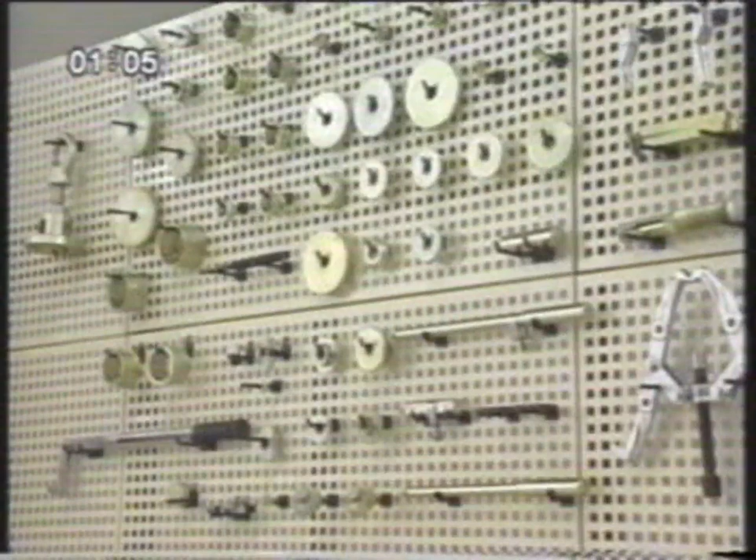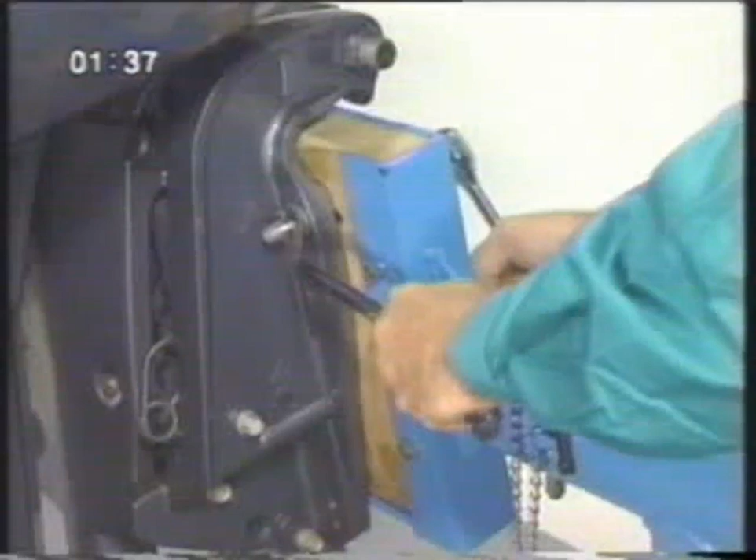For reliable disassembly work, check that the required tools and measuring equipment are all present. We recommend the use of Yamaha's original special tools to assure efficient, reliable work. We recommend you use the repair stand available from Yamaha to efficiently carry out the disassembly and reassembly of the power unit. The outboard motor should be secured to the repair stand with the bolts and nuts through the transom bracket.

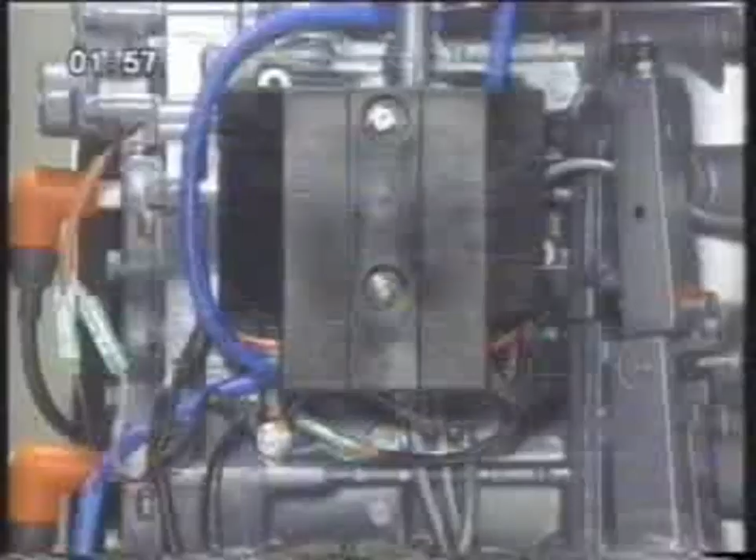Remove electrical parts from the starboard side. Remove the rectifier regulator. Remove the lead wire coupler and the ground. Then remove the two bolts. Remove the rectifier regulator together with the cover. Remove the shift rod lever and the solenoid lead wire joint. Remove the choke link rod on the carburetor side.

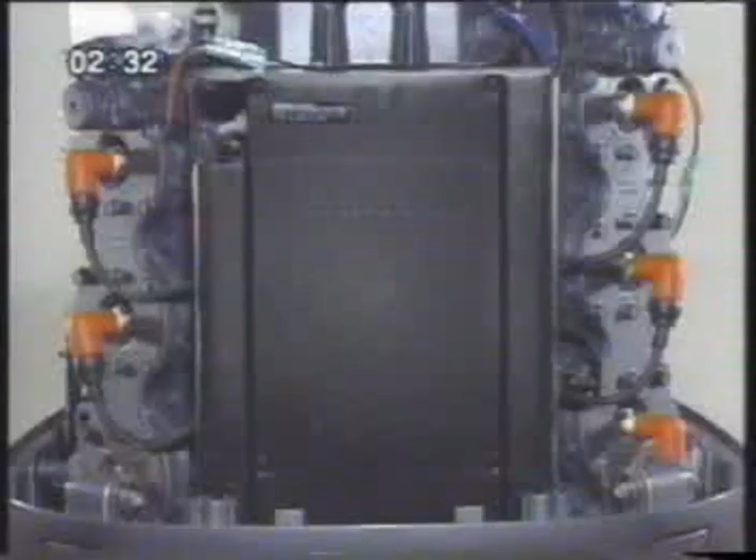Remove the CDI unit cover at the rear of the engine. Remove the coupler from the CDI unit, spark plug caps, and the ground lead from the exhaust cover. Remove the CDI unit and the ignition coil together with the bracket. Further remove the cooling water bypass hose and the pilot water hose.

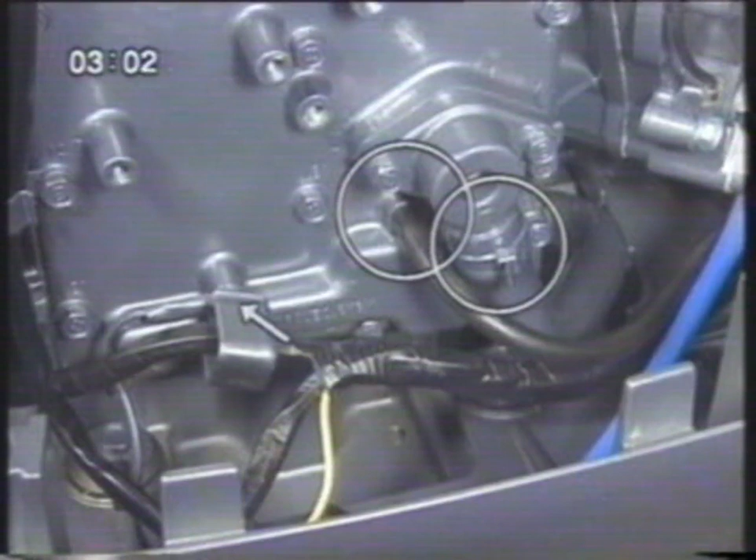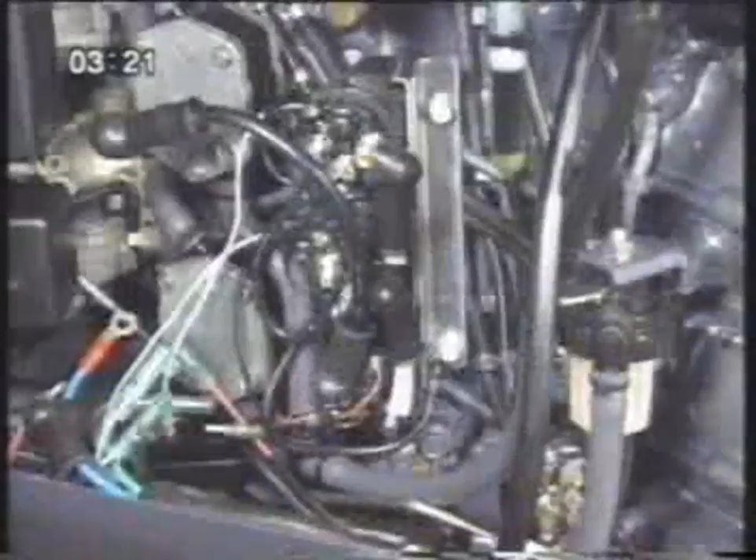Move to the port side and remove the battery cable, power trim and tilt wires, and starter relay wires. Now, remove the starter relay and the power trim and tilt relay together with the bracket. Remove the two bolts holding the shift rod bracket.

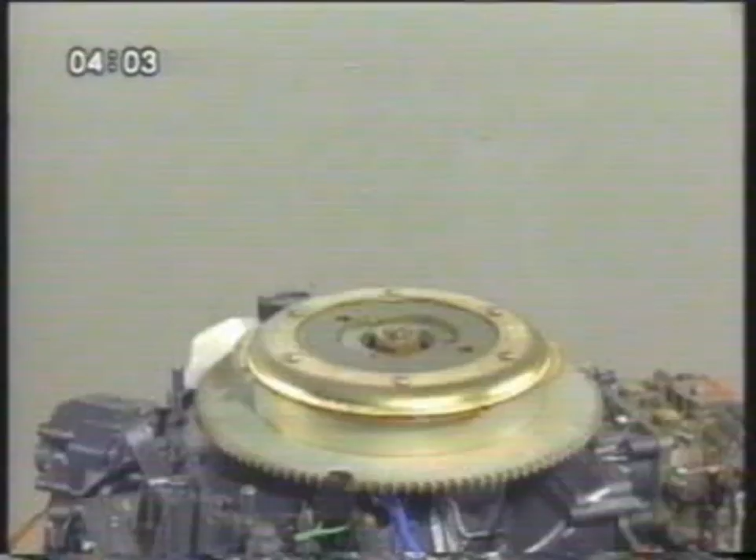Remove these screws and remove the silencer. At this time, remove the oil tank air breather hose and the fuel circulation hose attached to the silencer. Some models utilize silencers which separate into two pieces. Remove the flywheel cover, then remove the flywheel magneto. Loosen the flywheel nut by using the special tool and socket wrench.

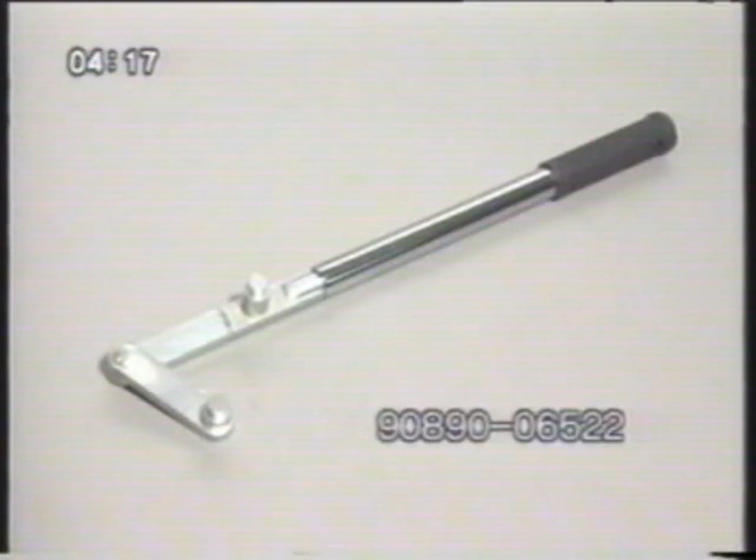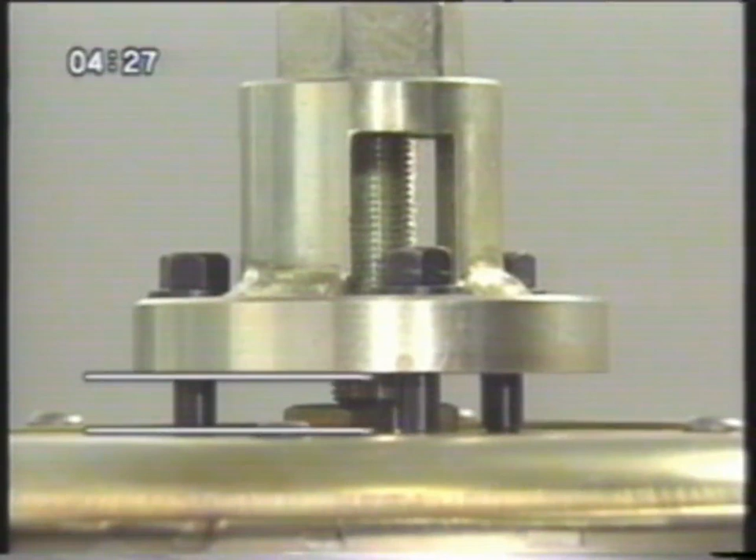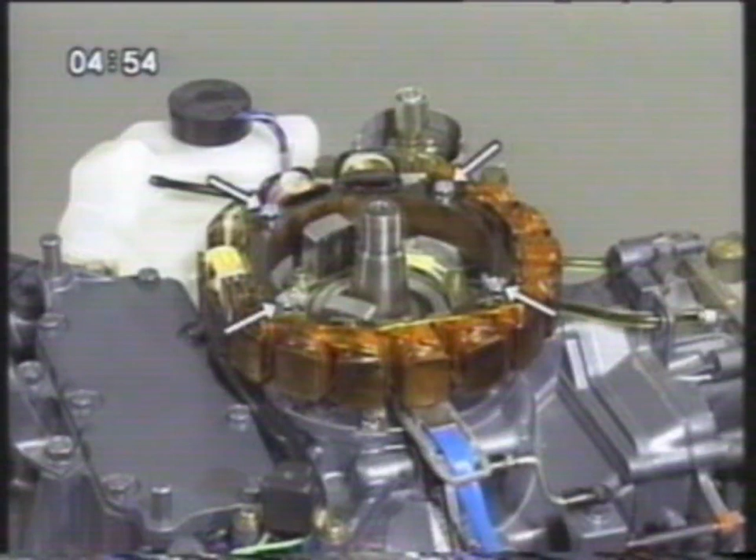Mount the flywheel puller so that the bottom will be parallel with the flywheel. To remove the flywheel magneto, mount the special tool and tighten the eye bolt. Apply impact to the eye bolt with a hammer to remove the flywheel from the taper fitting design. Remove the flywheel. Remove the stator coil assembly and the pulser coils in this order.

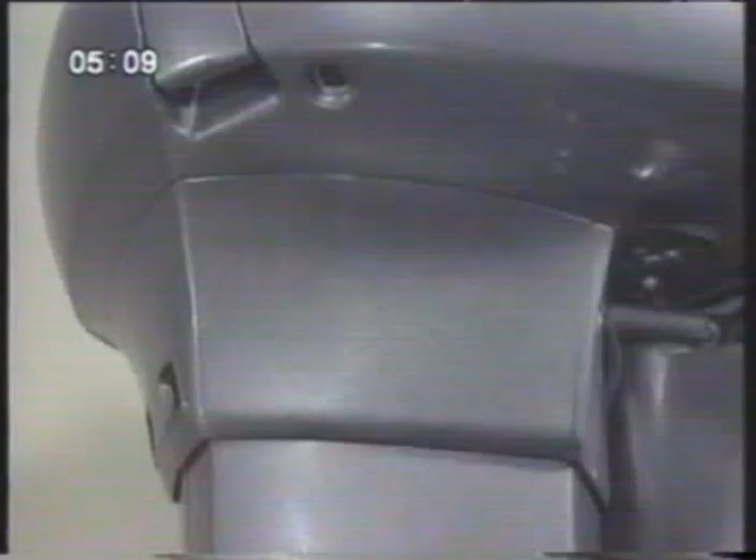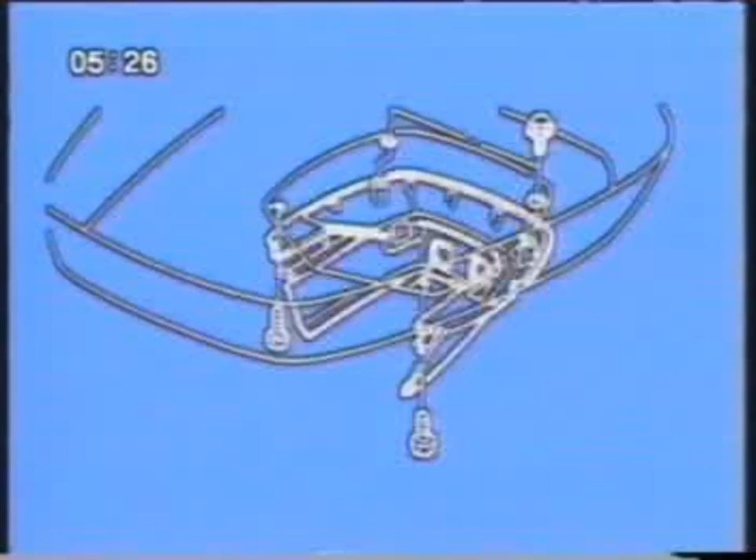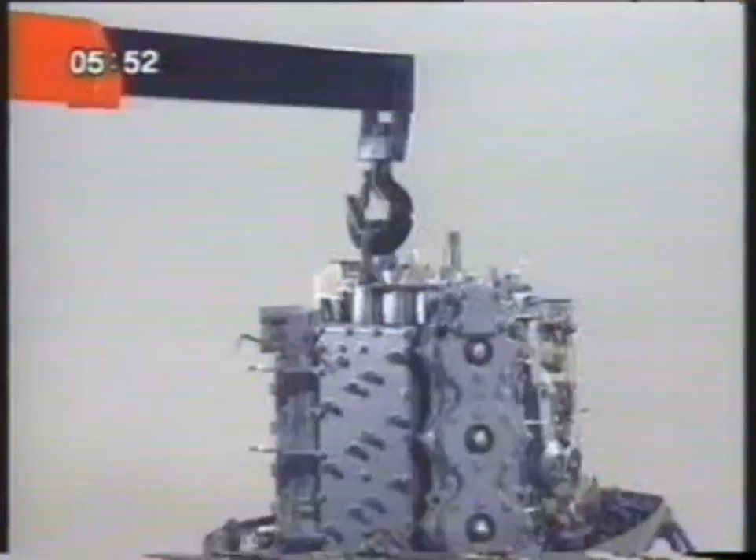Before removing the power unit from the upper case, remove the 2 apron mounting bolts and remove the apron. Remove the 2 inner bolts and 2 outer bolts from the bottom cowling, and remove the rear apron section. Now you can remove the 10 bolts and 2 nuts securing the engine to the bottom cowling. After removing the bolts and nuts, lift the engine upwards.

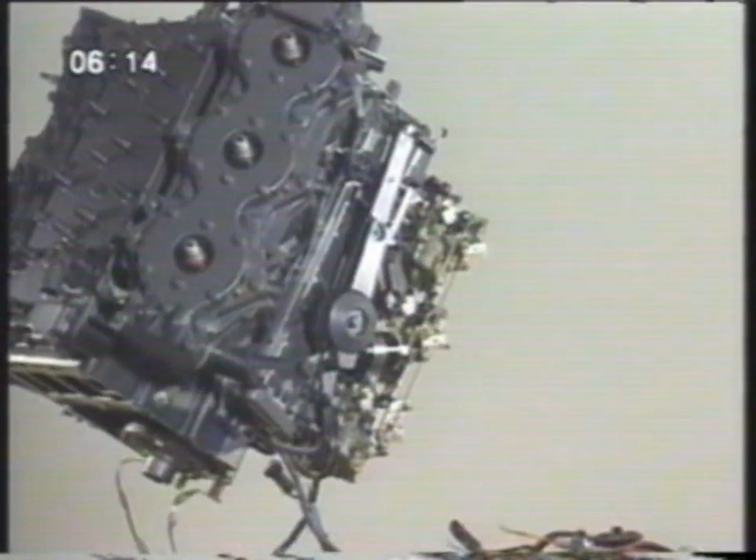Keeping the power unit balanced, lift it while carefully applying force under the carburetor with a wooden stick to remove the adherence of the upper casing gasket without damaging the bottom cowling. The power unit can also be lifted in this way. When placing the power unit on the workbench, be careful to keep the power unit stable.

Remove the fuel filter nut and fuel pump mounting bolts. Remove the 12 nuts mounting the carburetors. Remove the fuel filter, fuel pump, and carburetor together. For the oil injection model, remove the oil tank delivery hose on the oil pump side. When doing this, pinch the hose off to prevent oil from flowing out. Remove the oil tank. Remove the starter motor.

Remove the oil pump delivery pipe at the intake manifold side and remove the oil pump together with the delivery pipes. At this time, mark the delivery pipe with cylinder number to facilitate assembly. Remove the parts of the timing advance control system. Remove the bolts and remove the timing advance control lever together with the throttle cam. Remove the 2 bolts and remove the choke solenoid. This completes the removal of all the engine's outer parts.

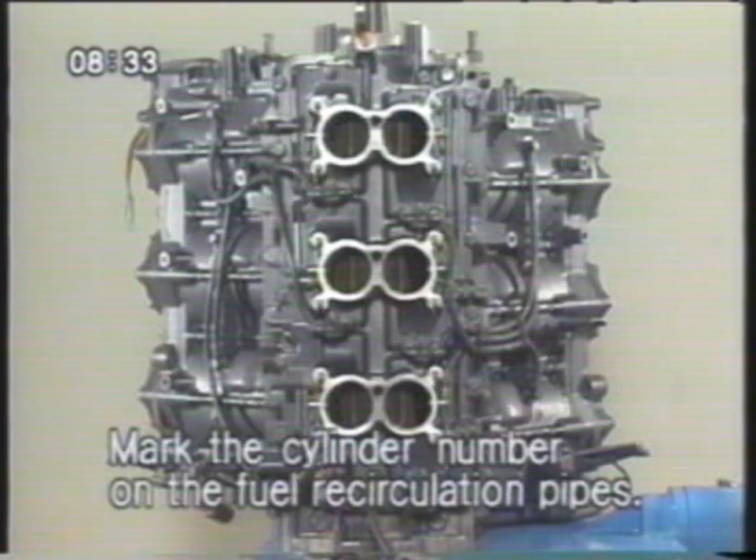You are now ready to begin the disassembly of the cylinder block. Remove the fuel recirculation pipes located on the cylinder block side. At this time, mark the cylinder number on the fuel recirculation pipe for easy and correct reassembly procedures. Remove the bolts and remove the intake manifold.

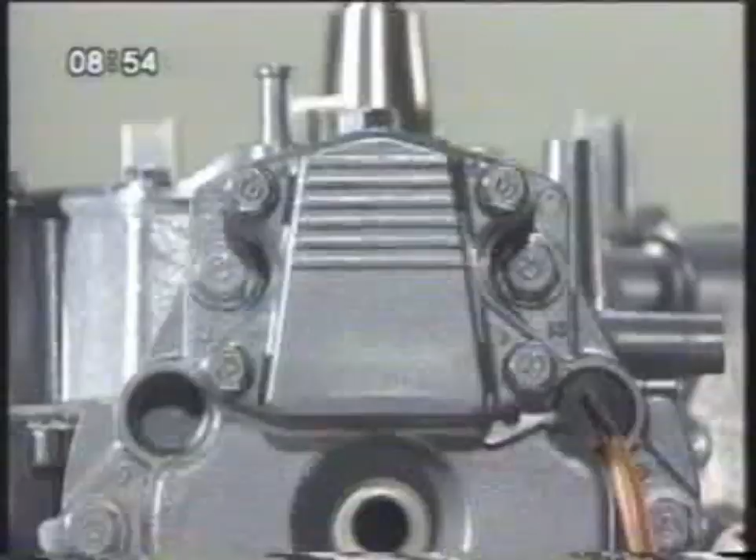After removing the spark plugs, remove the bolts and thermostat cover. Remove the thermostat.

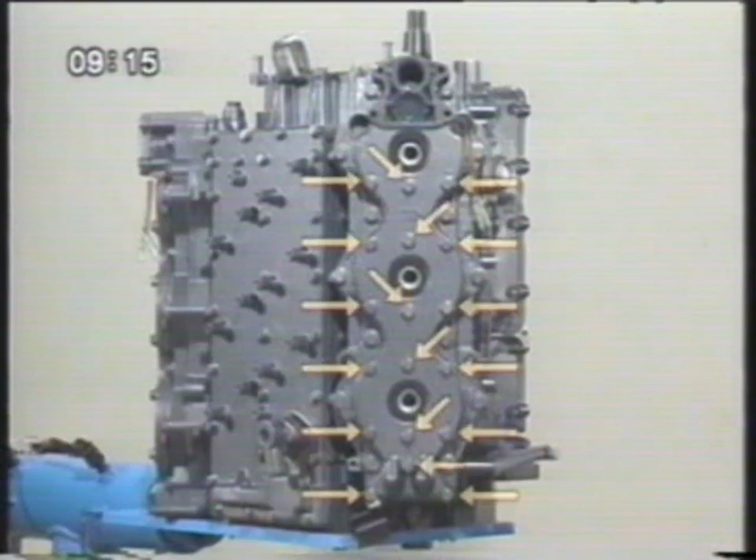Remove the cylinder head cover's 15 bolts. With screwdrivers, evenly apply force between the cylinder head cover's opposing flanged appendages and the cylinder head. Then remove the cylinder head cover. Remove the thermo switch sensor.

Remove the 14 cylinder head bolts indicated by the arrows. After removing the cylinder head, enter the cylinder's number on the piston's head. Remove the other cylinder head in the same manner.

If removing the exhaust cover, remove these bolts indicated by the arrows. Insert screwdrivers into the exhaust outer cover's flanged appendages and evenly apply force to remove the cover. After removing the outer cover, remove the inner cover in the same manner.

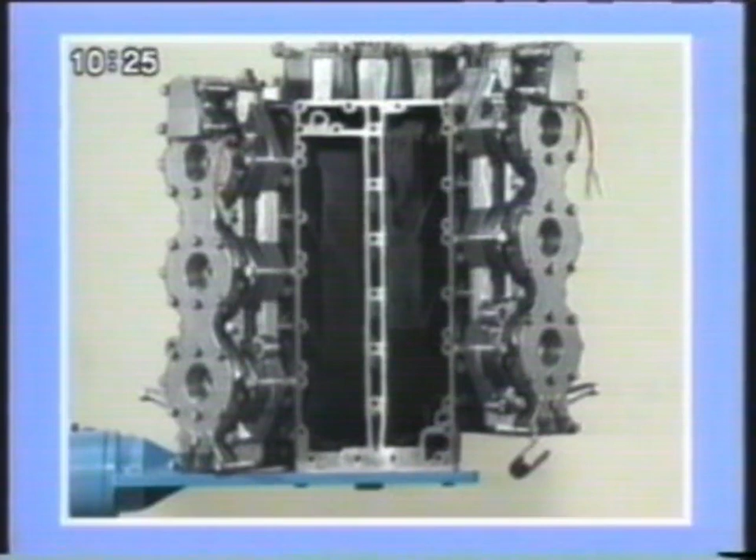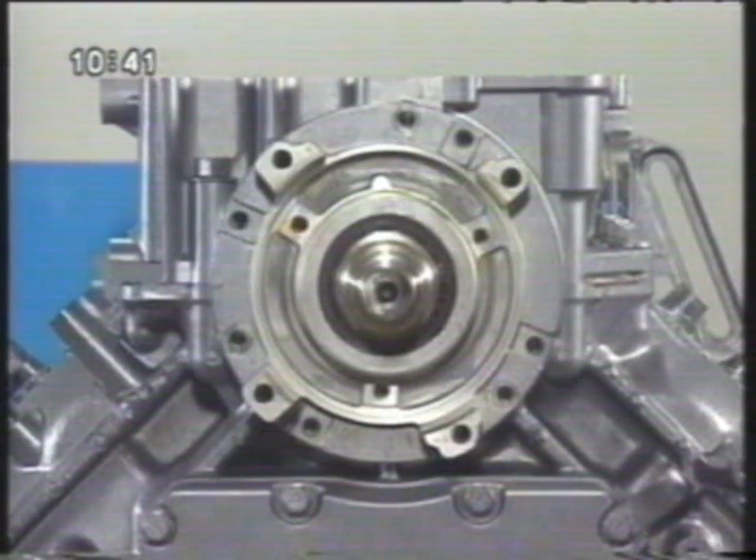Remove the bearing housing mounting bolts. Remove the oil seal housing mounting bolts. To remove the crankcase, remove these bolts indicated by the arrows.

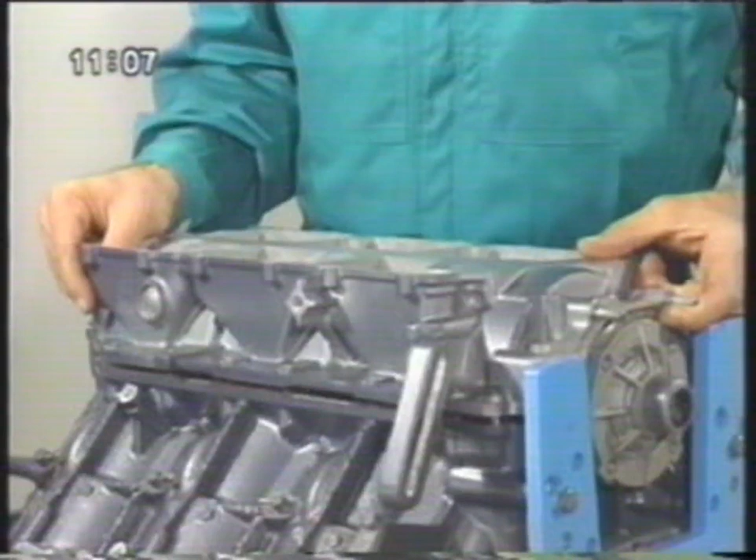Lift off the crankcase, keeping it level so as to prevent damaging the crankshaft seal rings. Extreme care should be taken to avoid cutting yourself on the machine parts, which may have sharp edges.

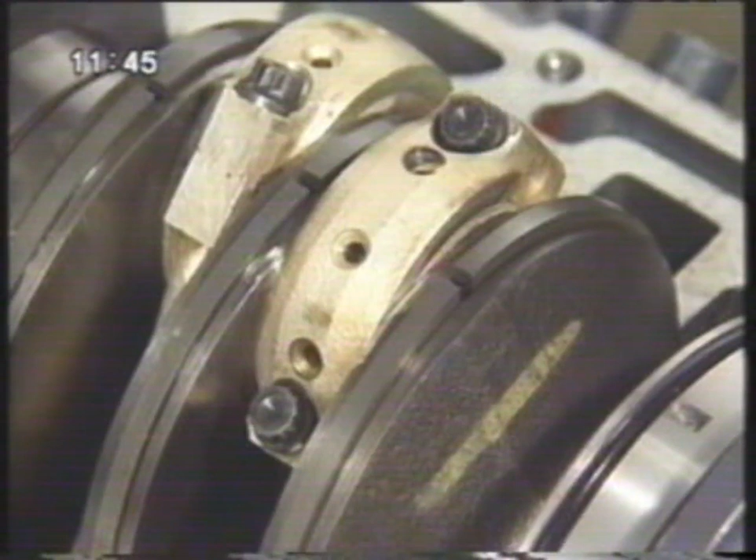When removing the piston from the cylinder block, mark the joint between the connecting rod cap and the connecting rod so that all mating parts can be kept together for reassembling. Alternately loosen the torque of the connecting rod bolts. Remove the connecting rod cap and the big end bearing.

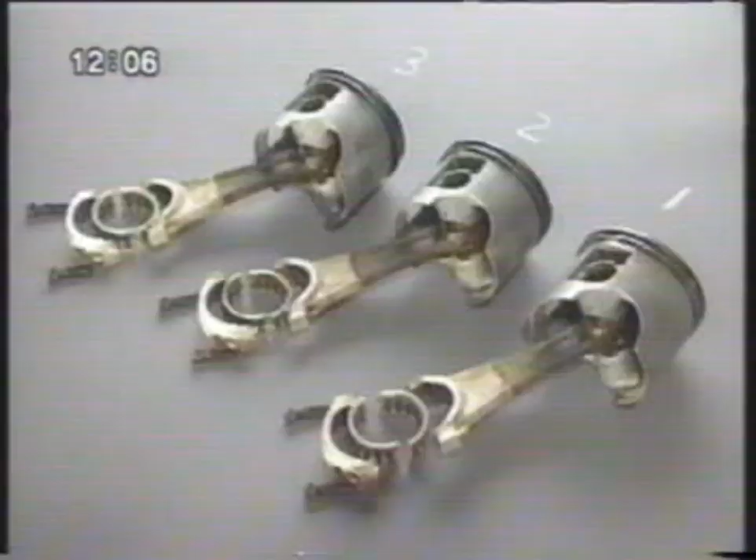Carefully slide out the piston and the connecting rod from the cylinder block. Enter the cylinder's number on each of the removed piston assemblies. Keep the mating connecting rod caps and big end bearings together as a set.

Slightly lift the crankshaft. Give a light shock to the outer race of the center bearings, then remove the crankshaft assembly from the cylinder block. Remove the crank center bearing and the crank seal rings from the crankshaft. For smooth reassembly, place the parts in the order in which they were removed.

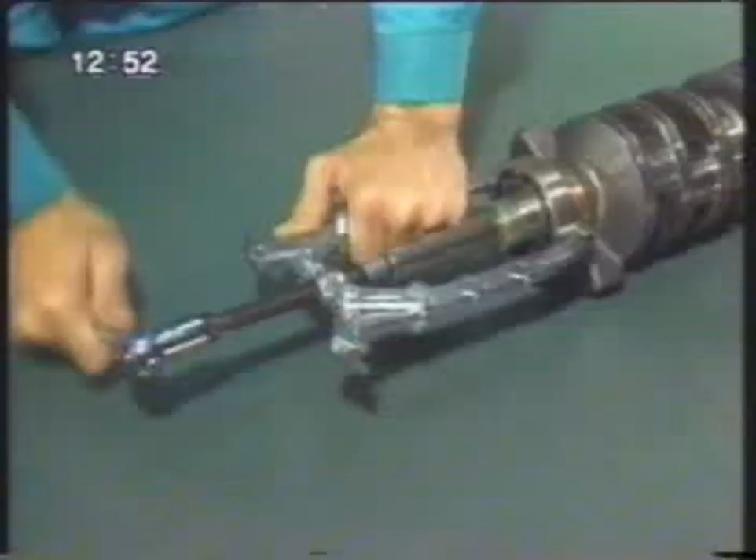To remove the crank lower bearing from the crankshaft, remove the circlip, then remove by using the bearing puller. For the oil injection model, remove the drive gear in the same manner. The drive gear is made of brass. Carefully remove the gear, or gear teeth may be chipped or broken.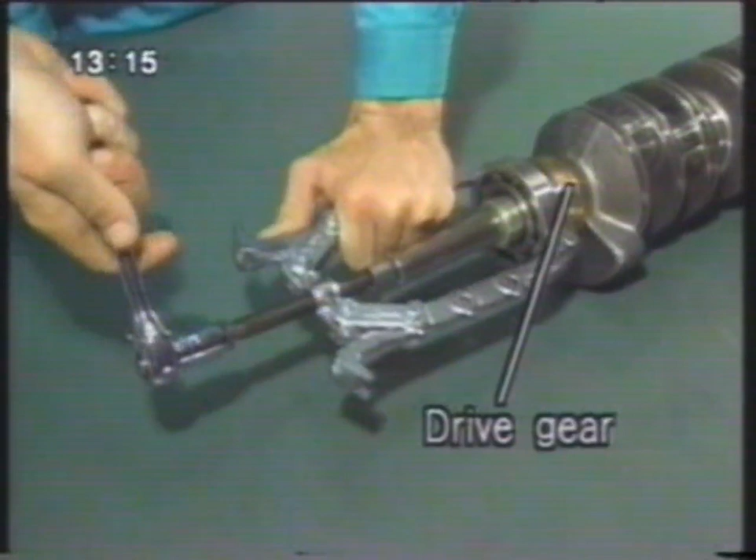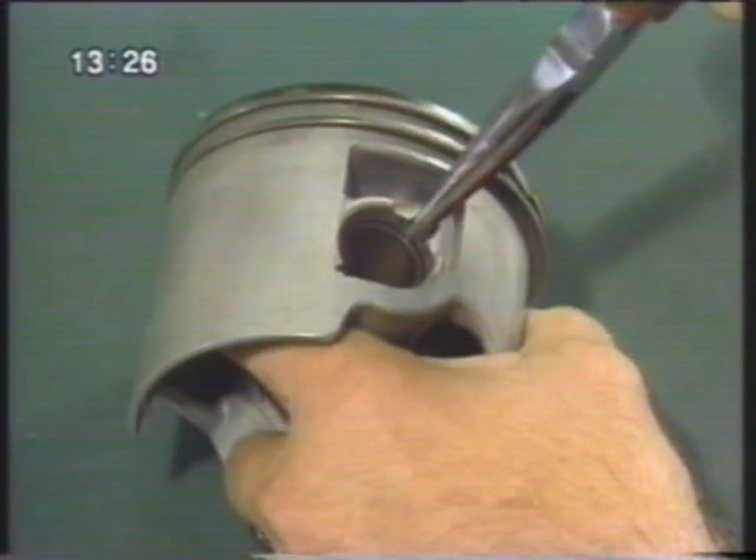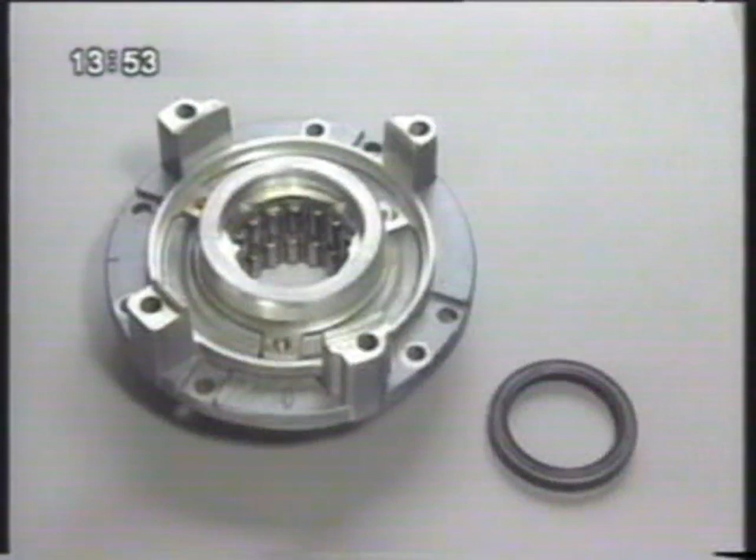Remove the clips from both sides of the piston pin holes. Disassemble the piston and piston pin from the connecting rod. To remove the upper bearing from the bearing housing, first remove the oil seal. Then, using the special tool, remove the bearing with a hydraulic press.

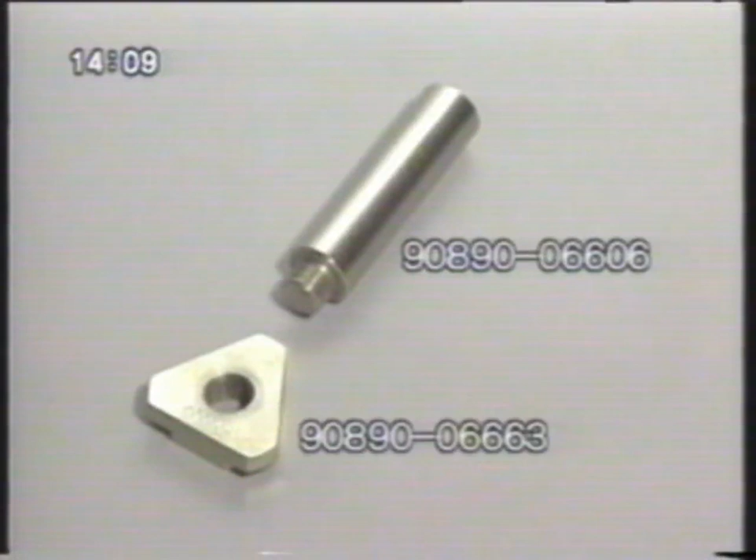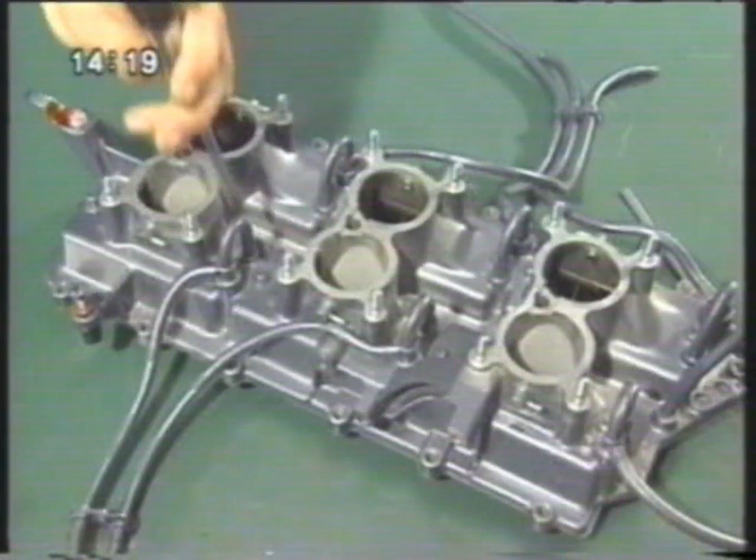After removing these screws from the intake manifold, remove the reed valve assembly. Be careful of dust and moisture around the removed reed valve assembly. Particularly use care not to expose it to direct sunlight.

This completes the power unit disassembly operation. Put each of the disassembled parts in order, then clean and inspect them. Replace any damaged part or part measured out of specification. For the inspection method and specification for each part, refer to the Service Manual's Inspection section.

For appropriate assembly, use all new gaskets, oil seals, and O-rings. When reassembling, also note the orientation and correct position of each part. Lubricate all moving parts and bearings with two-stroke engine oil.

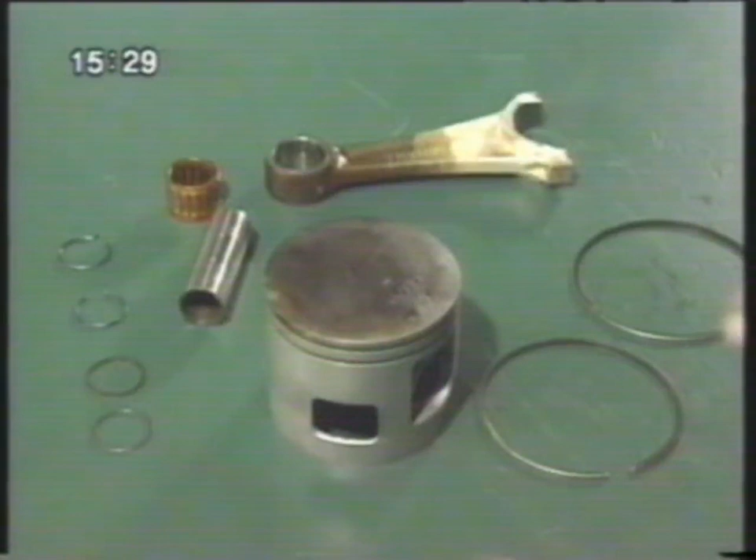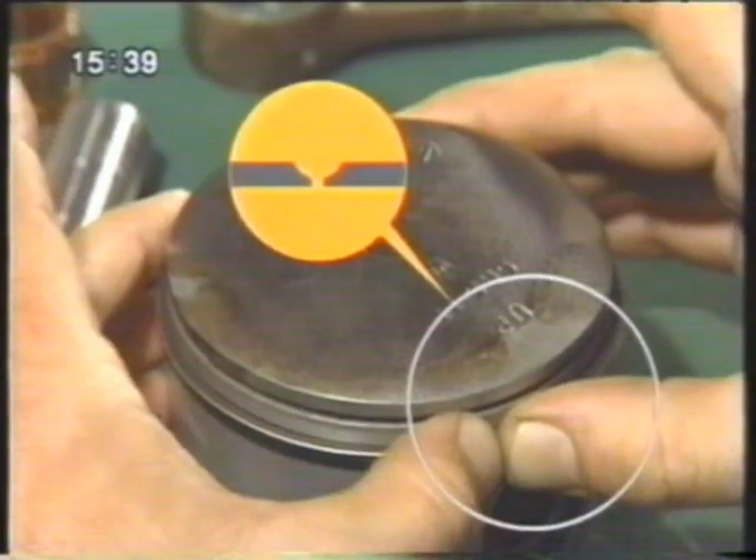First, begin with the assembly of the piston. To assemble the piston rings, be sure that the piston ring's end gap faces the piston head. Align the gap with this locator pin. When assembling the piston rings, mount the second ring and top ring in this order.

To assemble the piston and connecting rod, first align the Yamaha mark on the connecting rod with the up mark on the piston's head. Then install the small end bearing in the small end of the connecting rod and set the two washers in the correct direction.

To assemble the roller bearing into the crank's upper bearing housing, use the special tool and press fit with a hydraulic press. Be sure the bearing's manufacturer's mark faces up. The bearing outer race should be slightly coated with grease for easy press fitting.

Next, install the oil seal. After installing the oil seal, apply Yamaha's Grease A to the oil seal lip. And lubricate the bearing with two-stroke engine oil.

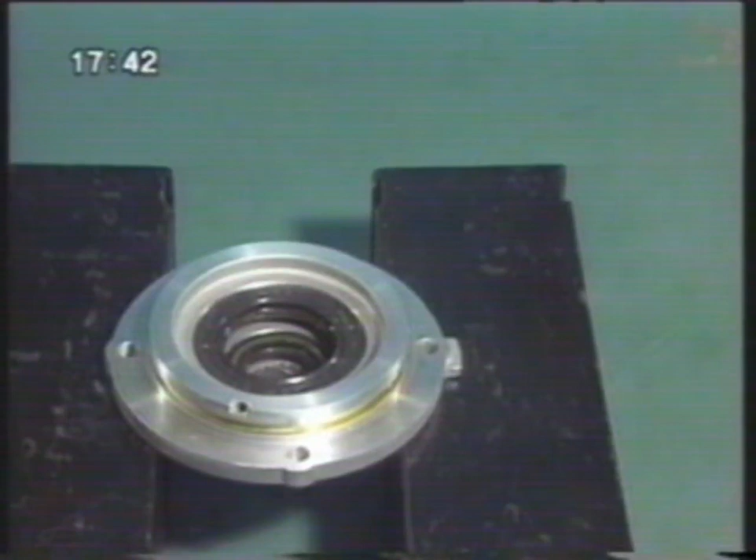Install the two oil seals into the crank's lower oil seal housing individually. Be sure they face in the correct direction. To tap in the oil seal, use a tool with a diameter slightly smaller than the outside diameter of the oil seal. After installing, apply Grease A to the oil seal inner lip.

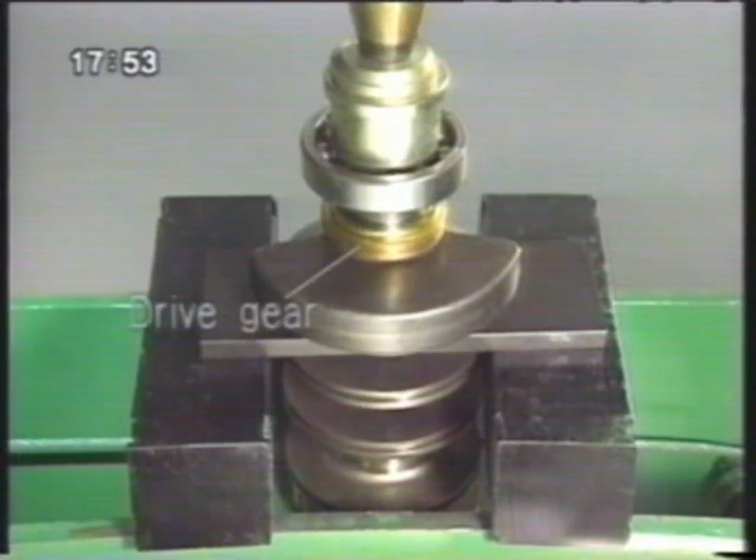To assemble the lower bearing to the crankshaft, carefully press the oil pump's drive gear with oil injection models, then press fit the lower bearing with the bearing's manufacturer's mark up by using the hydraulic press. And install the circlip. Now, assemble the crank seal rings and the center bearing.

Place the center bearing with the location pinhole facing down and secure it with a retainer ring. Assemble the piston into the cylinder block. Install the appropriate pistons with the S mark on the starboard side and the pistons with the P mark on the port side cylinders. Be sure the up mark is facing the flywheel.

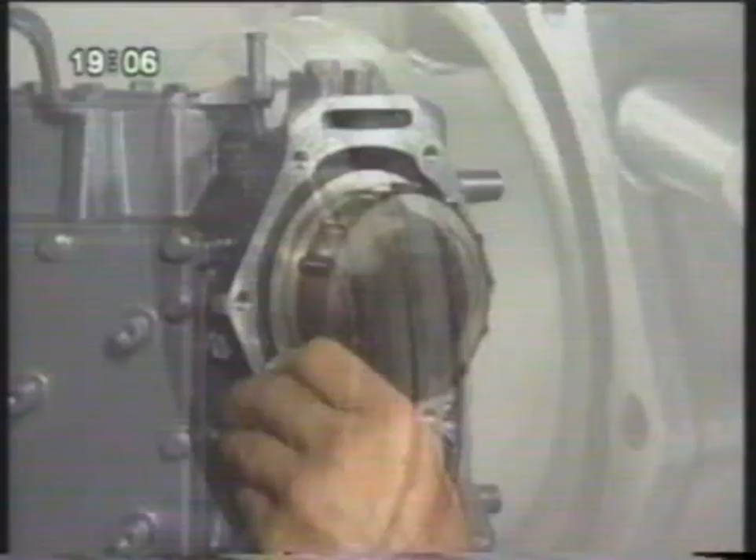Apply two-cycle engine oil to the piston rings, piston periphery, and cylinder inner wall. Further check that the piston ring's end gap is at the locator pin position. Install the piston in the cylinder by using the piston ring compressor.

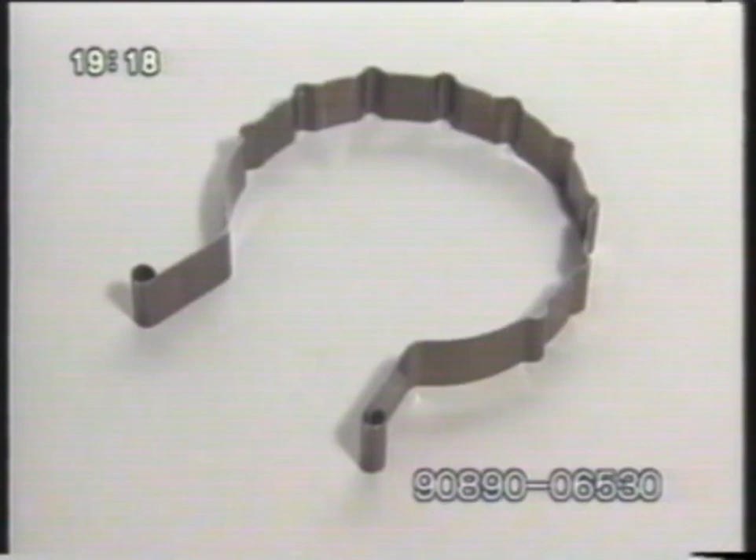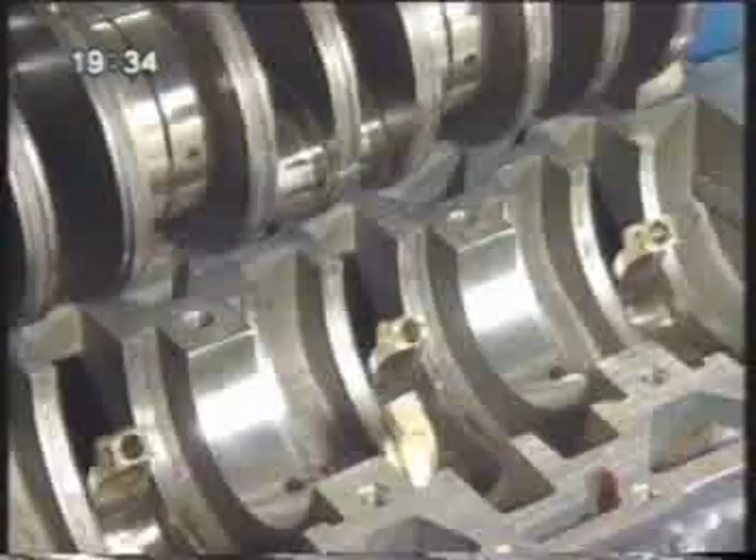When assembling the pistons to the crankshaft and the engine block is turned with the crankcase surface upward, take care that the pistons don't slide out and fall before being connected to the crankshaft. Align the center bearing's location pinhole with the pin on the cylinder block. Assemble the crankshaft with the seal ring end gaps aligned at the upper surface.

Align the arrow mark of the crank's upper bearing housing in the direction of the exhaust cover. Also, align the two projections on the oil seal housing with the exhaust cover side. Assemble the 6 connecting rods to the crankshaft. Tighten each bolt twice by using the torque wrench. Both bolts should be tightened evenly on each cylinder. First, tighten them to the specified torque.

Check that the connecting rod cap end is aligned with the connecting rod end with your fingernail. If aligned, tighten the bolts to the specified rated torque. Loosen them a half turn. Now retighten them to the specified torque once again. Finally, apply two-stroke engine oil to the bearings and seal rings and check that the crankshaft turns smoothly.

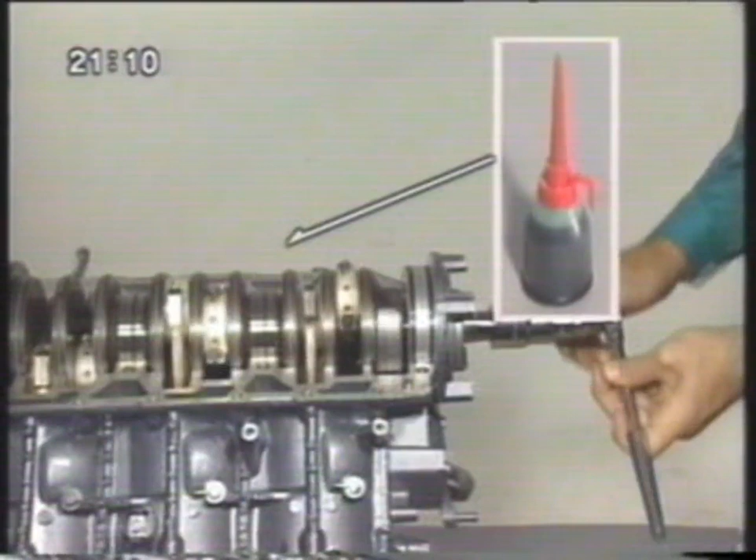Install the crankcase. Remove oil and dirt from the crankcase contact surface with clean rags. Thinly spread the gasket maker over the contact surface of the cylinder block and install the crankcase while paying attention to the location pins. Install the crankcase while carefully holding it level.

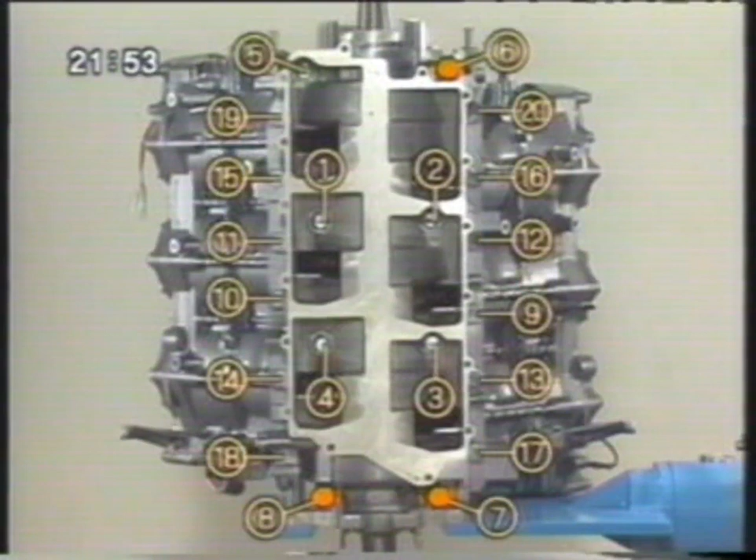Tighten the 12 M8 bolts located on the outside surface area and the 8 M10 bolts located on the inside in a two-step order as shown. Mount these 3 bolts with painted coated hexagon heads on the outside of the crankcase. Tighten the bearing housing bolts in a clockwise order. Tighten the lower oil seal housing bolts with the specified torque in a diagonally crossed pattern.

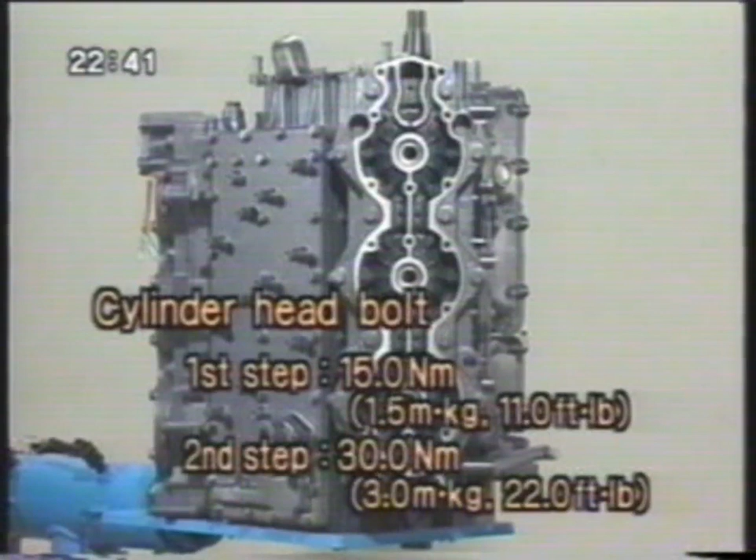Install the cylinder head. As before, tighten the 14 bolts with the specified torque in a two-step order as shown. Install the thermo switch and mount the cylinder head cover. After mounting the thermostat and thermostat cover, tighten the bolt to the specified torque as found stamped on the cylinder head cover.

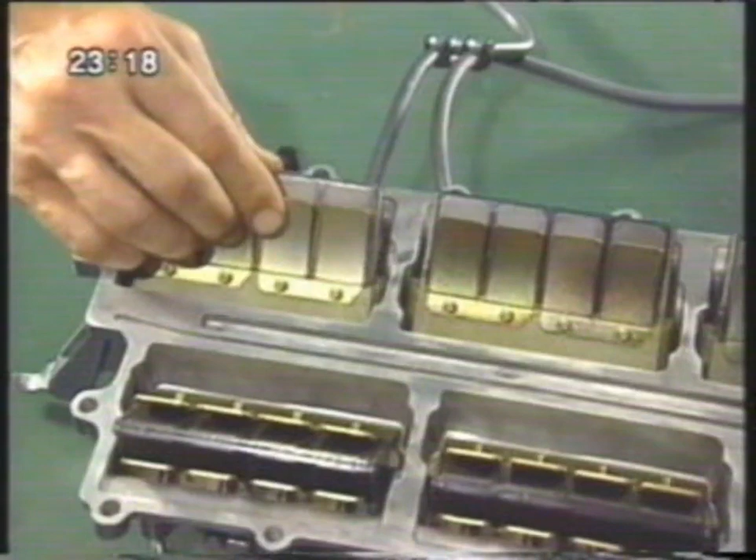Next, assemble the intake manifold. After assembling the 6 reed valves to the intake manifold, install the manifold to the crankcase. Tighten the 16 bolts to the specified torque in a two-step sequence as shown. Connect the fuel recirculation pipes. On the starboard side, install the 3 pipes. On the port side, lay the pipes as shown.

On the starboard side, assemble the magneto control lever, throttle control cam, and choke solenoid. On the port side, mount the oil injection pump and delivery pipes. Lay the pipes as shown. Mount the starter motor, the oil tank, the carburetor, fuel filter, and fuel pump.

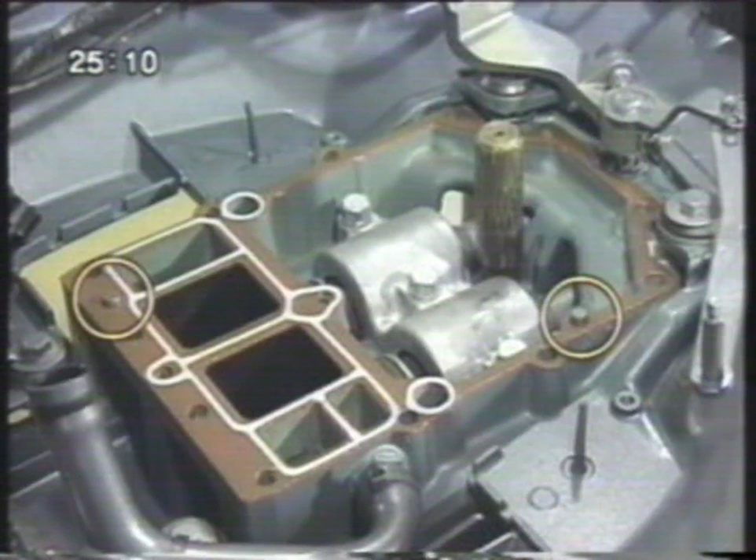Mount the power unit onto the upper casing. Place a new gasket and install the location pins. Apply grease to the splines of the drive shaft. Lift the power unit while holding it level. Slowly lower the power unit while ensuring that the mating parts properly join together. Slightly turn the flywheel in each direction until the crankshaft and driveshaft splines align. Tighten the 6 longer bolts, 4 shorter bolts, and 2 nuts to the specified torque.

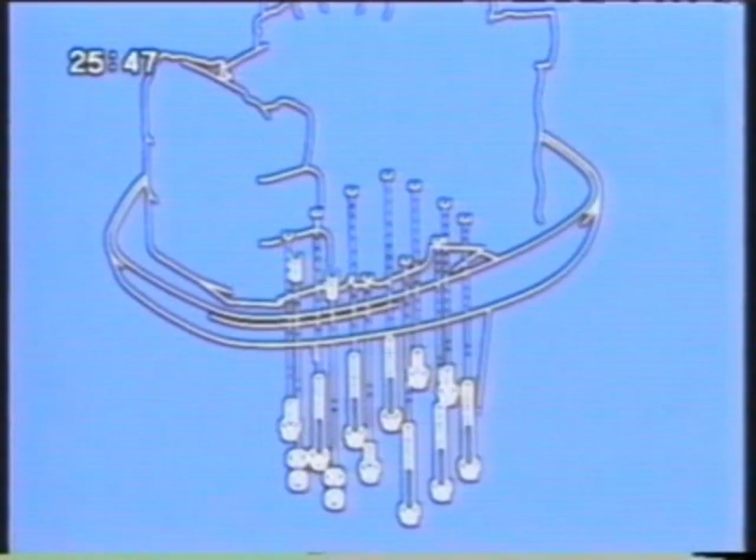Next, install the rear apron and tighten the 4 bolts. Then install the front apron and tighten the 2 bolts which hold it in place. Now install the pulser coil unit. Apply a thin coat of anti-seize grease around the retainer base. Set the control lever arm to the correct position, install and tighten the 3 screws.

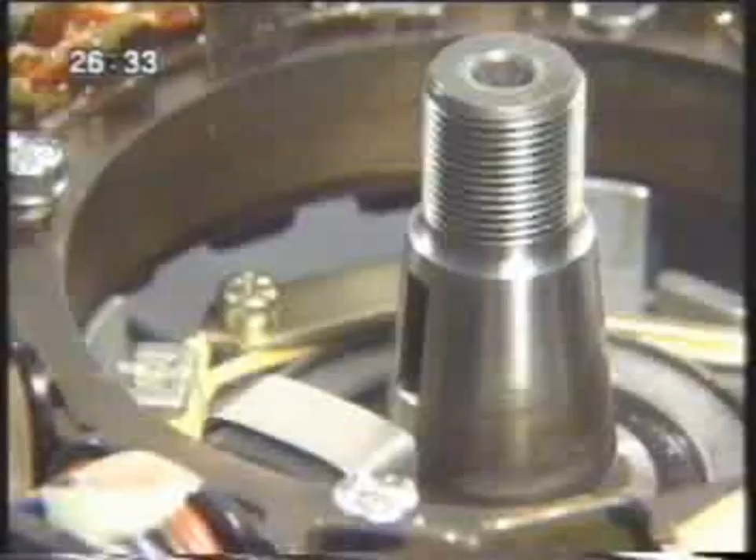Install the stator coil. Install the woodruff key in the crankshaft. Check that the key is reliably put in the slot. Fit the key into the crankshaft's keyway. Check and make sure the key has not been dislodged after the flywheel's installation. Using the special tool, secure the flywheel magnet and tighten the nut to the specified torque.

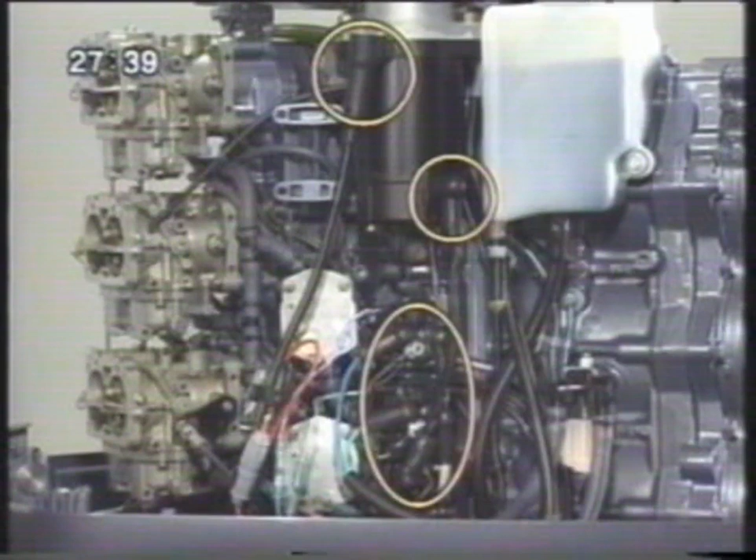On the port side, install the shift rod bracket. Install the starter and power trim and tilt relay bracket. Attach the battery cable, power trim and tilt relay cord, and starter relay cord. At the rear, install the ground wire and pilot and outlet water hoses.

Install the CDI unit and ignition coil together with the bracket. Connect the coupler. Put the cover in place. On the starboard side, install the shift rod lever and the solenoid lead wire joint. Connect the choke link rod.

Install the rectifier regulator assembly. Connect the lead wire coupler and ground wire. This completes the engine reassembly. Once again, check the piping and wiring for misconnections.

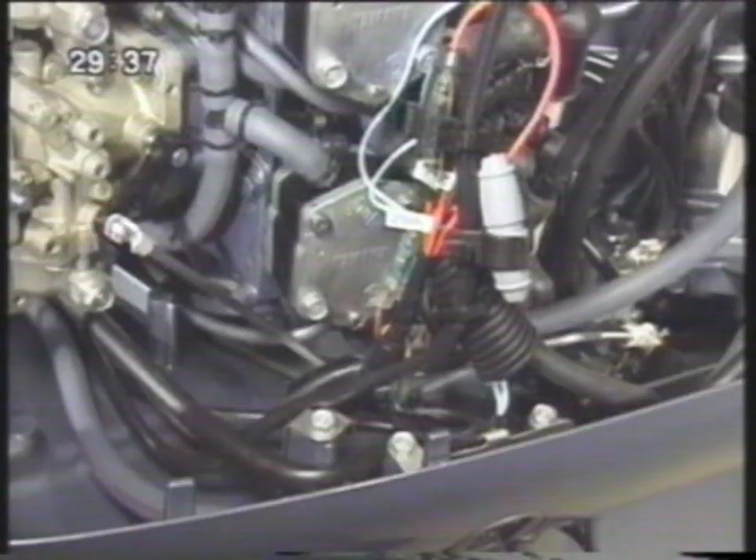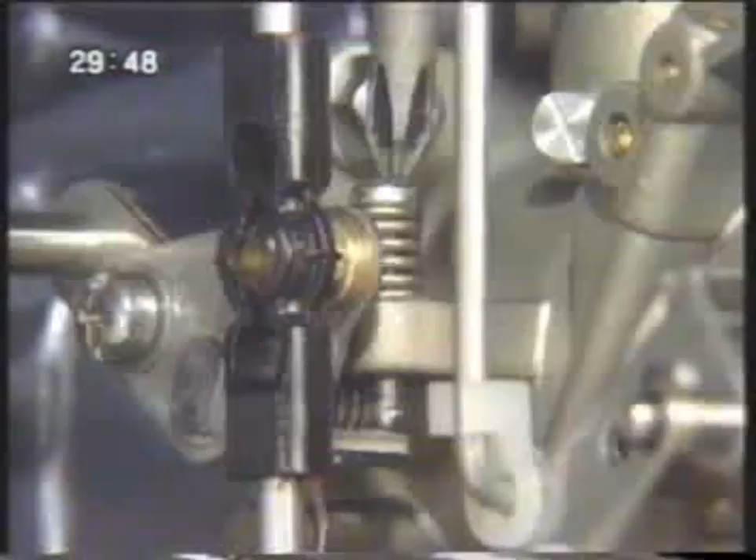Adjust the carburetor linkages. First, remove the throttle control link. Then remove the oil injection control link. Loosen the idle adjust screw. Record the number of turns out until the idle adjust screw is not contacting the throttle arm stopper.

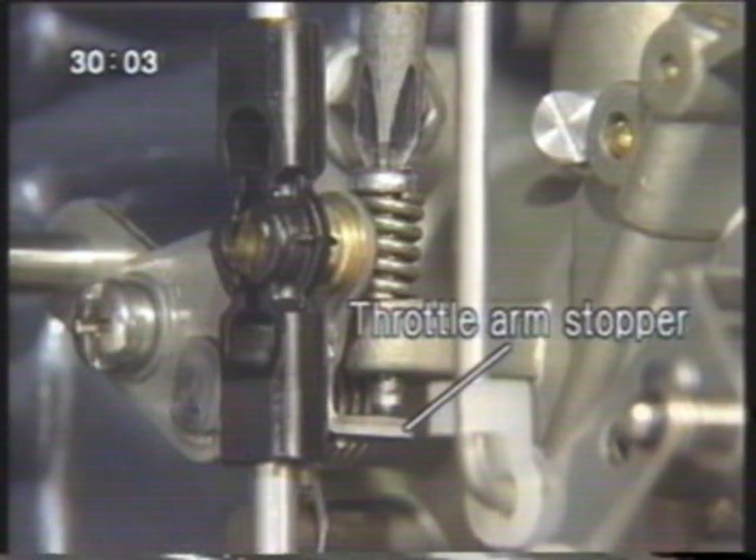Then, loosen the upper and lower carburetor throttle valve securing screws by turning counterclockwise. Hold the linkage downwards to check that all the upper, middle, and lower carburetor throttle valves are closed completely. Tighten the 2 screws on the upper and lower carburetor by turning clockwise, while also supporting the linkage connections.

Tighten the idle adjust screw on the middle carburetor. This time, after the screw end touches the throttle arm stopper, further retighten the adjust screw by your previously recorded removal count of turns.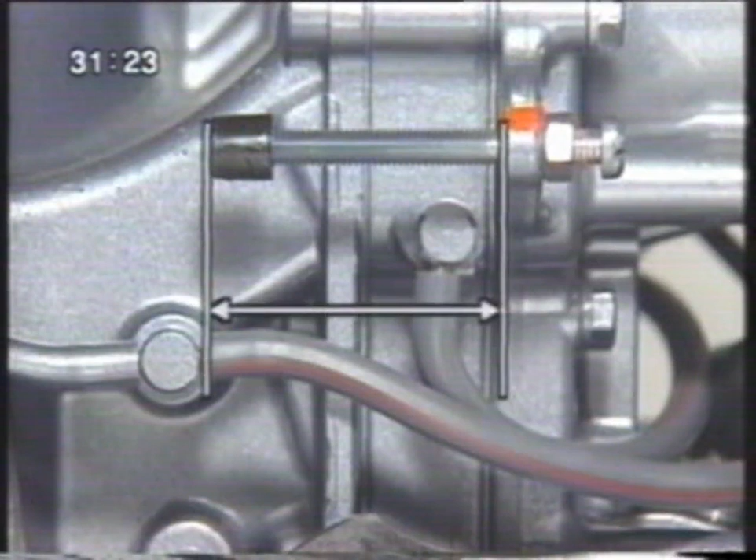Adjust the stopper lengths of the timing advance control lever. First, adjust the full advance adjust screw to the specified length found in the service manual. Then adjust the full retard adjust screw to its specified length. Adjust the length of the 2 control links. Adjust this timing control link's length to specification as well. Adjust the throttle cam control link to its specified length.

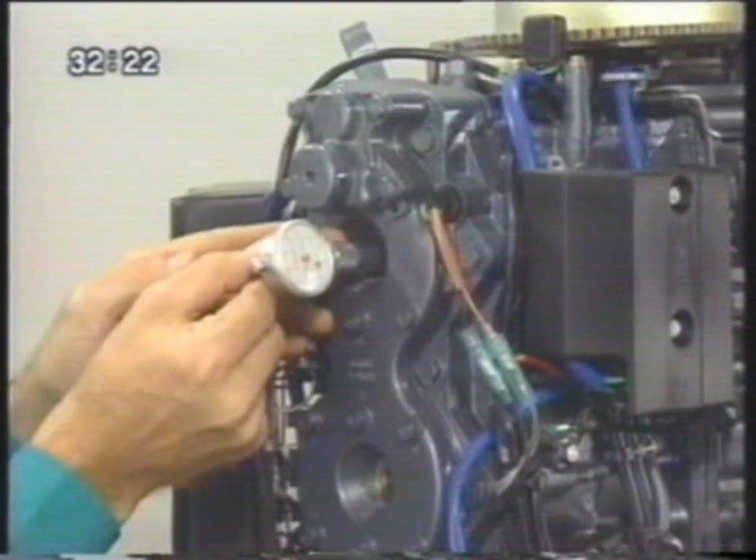After finishing these adjustments, adjust the ignition timing. Set the dial gauge into the number 1 cylinder. While slowly turning the flywheel clockwise, find the top dead center position of the piston. Then, check to see if the timing plate is aligned with the timing mark top dead center found on the flywheel. If not, align the timing plate's pointer with the top dead center mark.

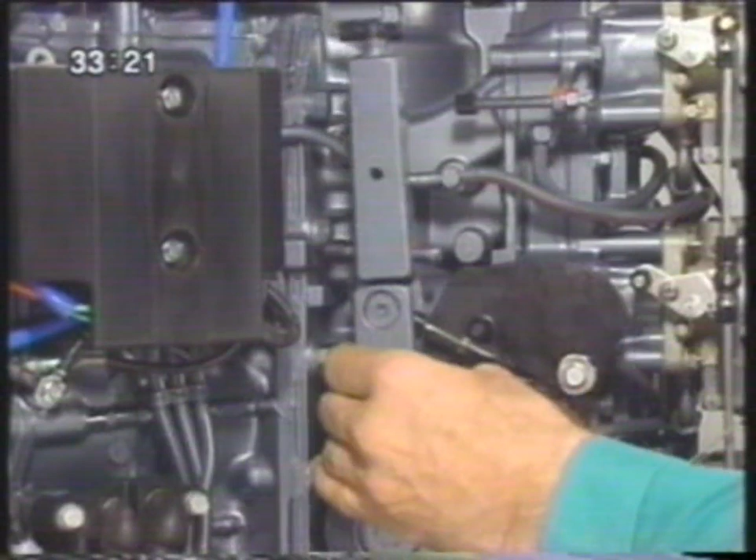Adjust the full advanced ignition timing. Turn the flywheel counterclockwise to align the mark on the flywheel with the timing plate's pointer. Push the magnet control lever until it touches the full advance stopper. Check that the flywheel's underside mark is aligned with the pulsar assembly arm end mark. If not, adjust the high-speed stopper bolt.

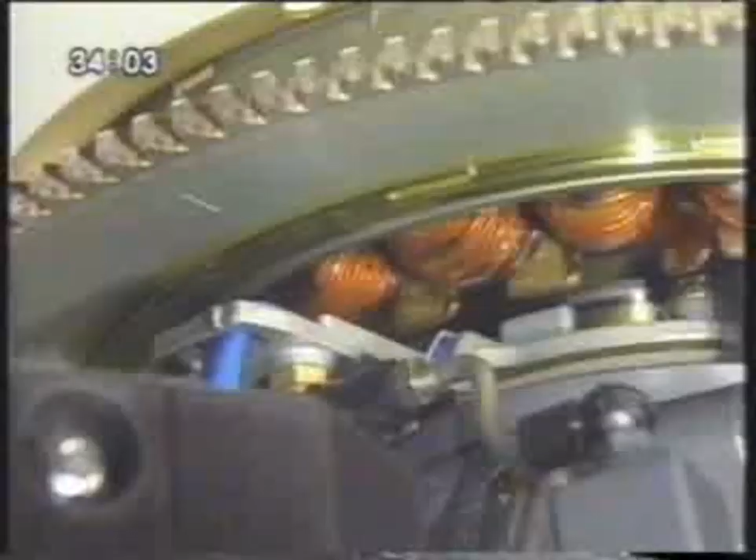Then, adjust the full retard ignition timing. In the same manner as at full advance timing, adjust the flywheel for the specified timing degree angle. Move the magnet control lever toward the full retard side until it touches the low-speed stopper. Check that the flywheel's underside mark is aligned with the pulsar assembly arm end mark. If not, adjust the low-speed stopper bolt.

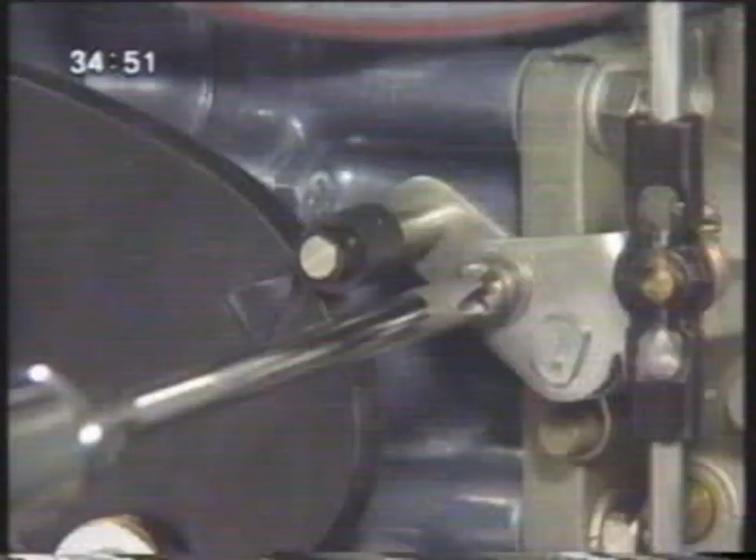Adjust the pickup timing for the carburetor. First, check that the mark on the throttle cam is aligned with the throttle roller's center. If not, adjust by loosening the throttle roller adjust screw. Then retighten after aligning. In the same manner as on the full retard timing procedures, adjust the pickup ignition timing. Adjust to the specified length for the throttle cam control link and reattach the joint connector.

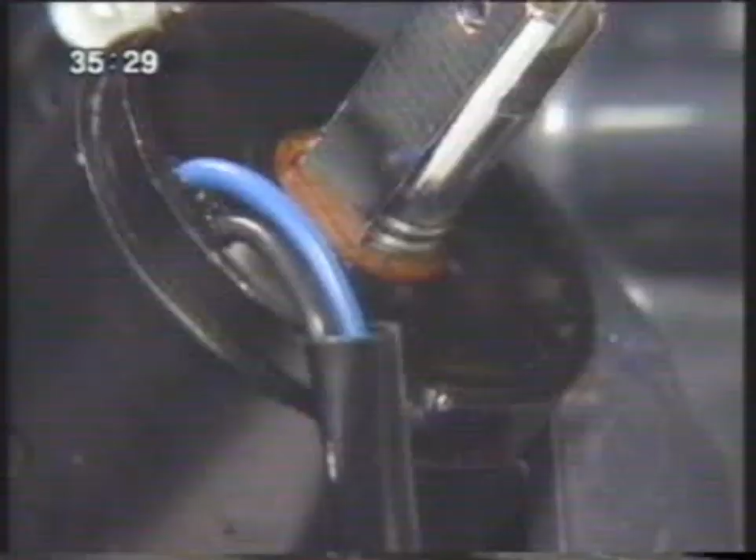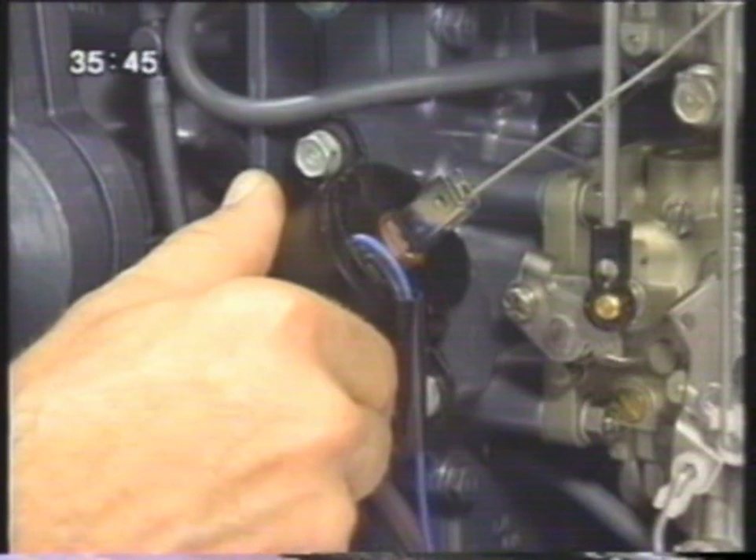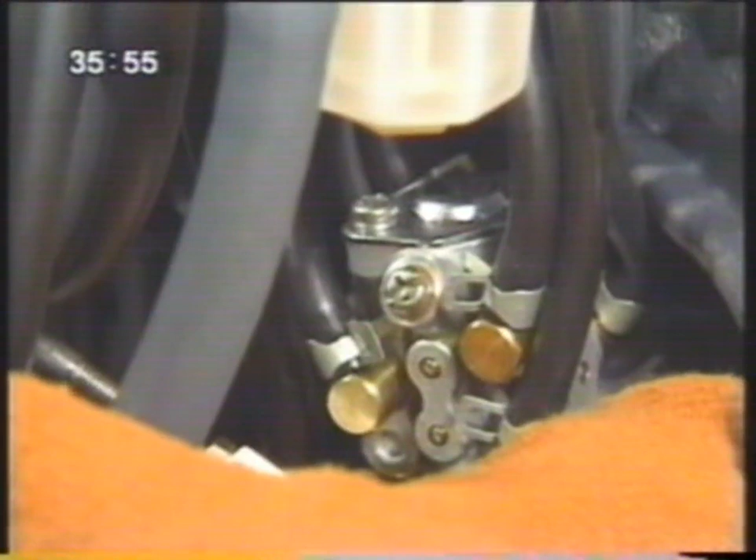Adjust the choke solenoid. Loosen the choke solenoid mounting bolt. Align the grooved mark on the circumference of the solenoid's plunger with the solenoid coil's end surface and retighten the mounting bolt. Adjust the oil injection system. Lay a rag under the pump to soak up dripping oil and purge the air until air bubbles no longer come out by loosening the air bleed screw.

As done before, loosen the idle adjust screw. Record the number of turns out after the idle adjust screw's end leaves the throttle arm stopper. While holding the oil injection pump lever at the full retard position, loosen the lock nut, and adjust the control link's length to the correct specification and retighten the lock nut.

Retighten the idle adjust screw. After the screw end touches the throttle arm stopper, further tighten the adjust screw by your previously recorded number of turns. This completes the major required adjustments.